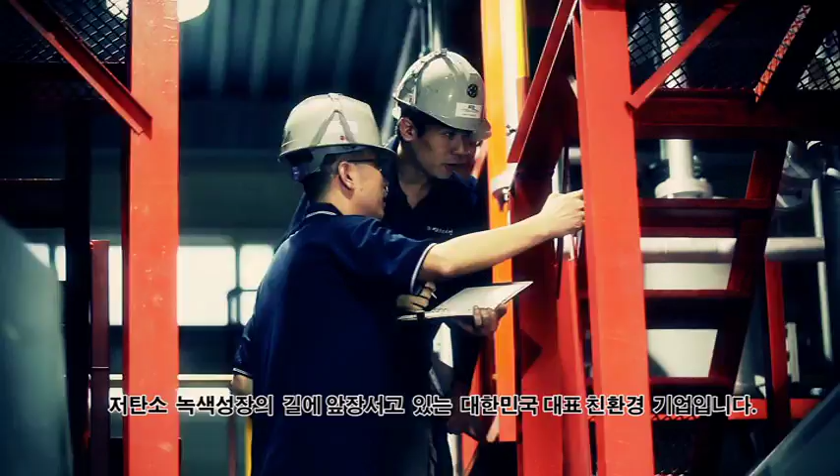Ecocreation is a Korean representative eco-friendly company which is taking the lead in the road of low-carbon green growth under the theme of the treatment of wounded Earth and coexistence of mankind.

Today, the level of environmental pollution is beyond warning and approaching as one of the great national disasters.

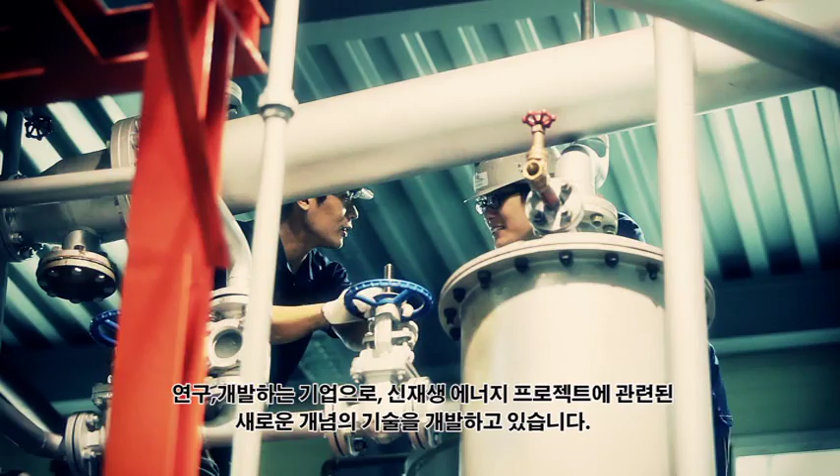Ecocreation has developed a new concept of technology related with new renewable energy project as the company which researches and develops the activation of recycled resources and the alternative energy to prepare for fossil fuel depletion.

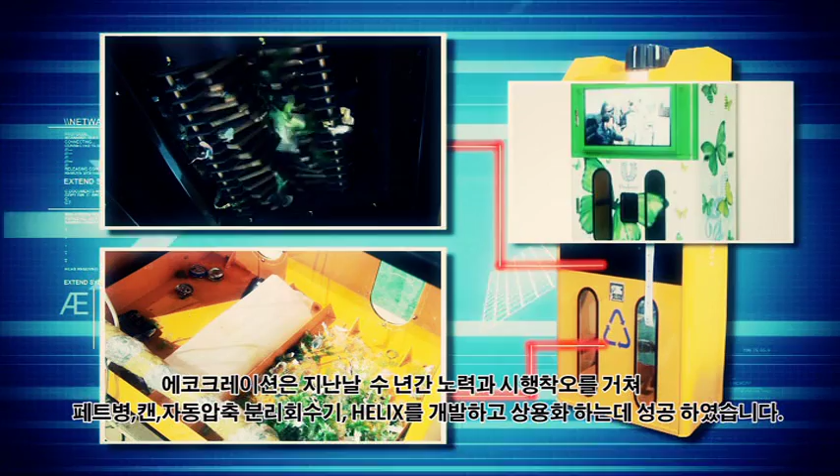Ecocreation has succeeded in developing and commercializing Helix, which is the reverse vending machine for PET bottles and cans, through the efforts and trial and error for many years in the past.

It caught the attention of related industries and newly pioneered the clean technology sector in the field of new renewable energy of high added value from the waste materials of low value added. It is also opening a CO2 emissions reduction and green environment era for the prevention of global warming.

The annual amount of waste plastics is estimated at 6 million tons only in Korea. Also, it is not corroded but accumulated, and so it has a devastating impact on the ecological environment.

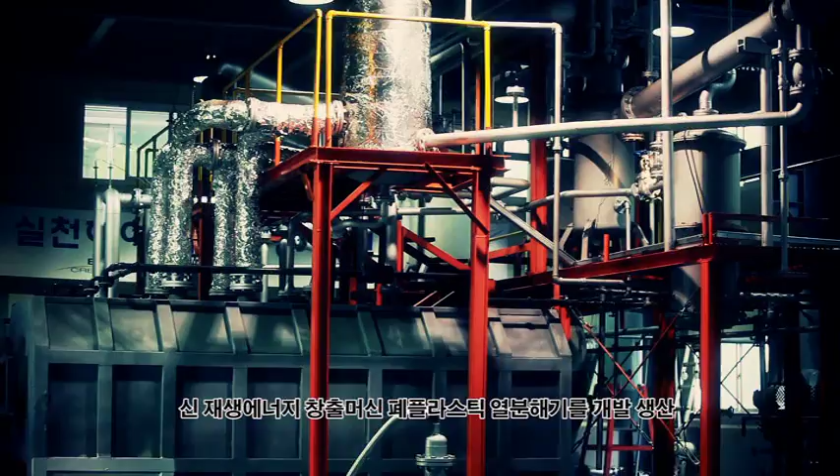In order to improve these parts, Ecocreation is developing and producing the pyrolysis machine of waste plastics, which is a new renewable energy generating machine, through the efforts of many years and labor management unity.

Ecocreation is approaching alternatives to the global environmental problems with a different perspective.

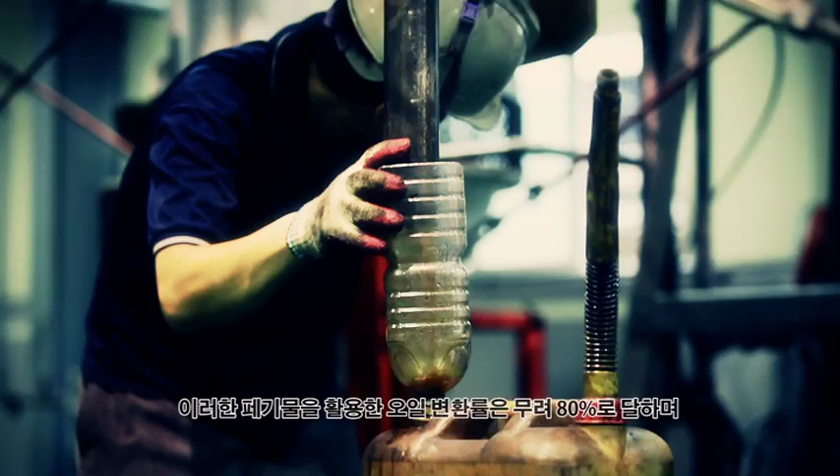The pyrolysis machine of waste plastics is a new renewable energy production machine which is used for diesel engines, generator fuel, industrial boilers, etc., by converting waste plastics, waste lubricating oil, etc. to new oil. The oil conversion rate by utilizing these wastes is as high as 80%.

It is energy which has a more powerful effect than incineration, solid fuel, or gasification business.

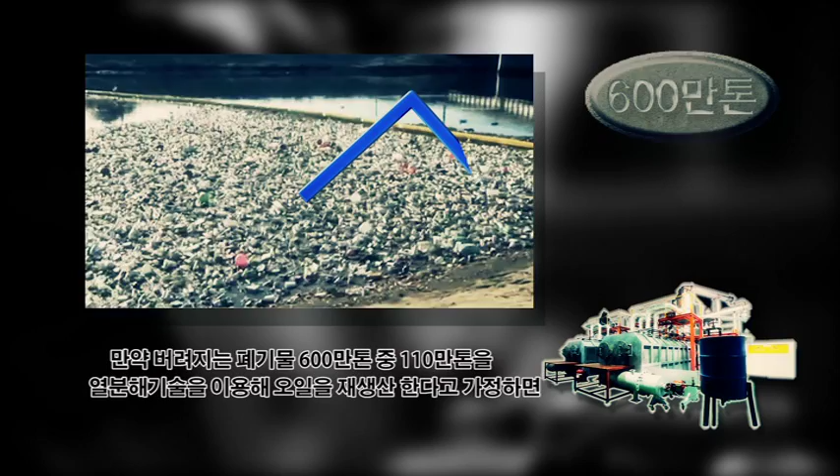Assuming that 1.1 million tons from the 6 million tons of dumped wastes are reproduced as oil by using pyrolysis technology, we could achieve approximately 880,000 tons of oil import substitution effect.

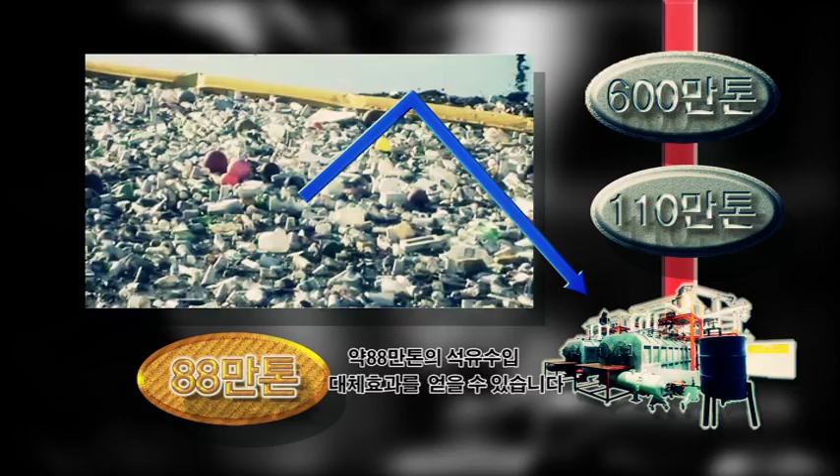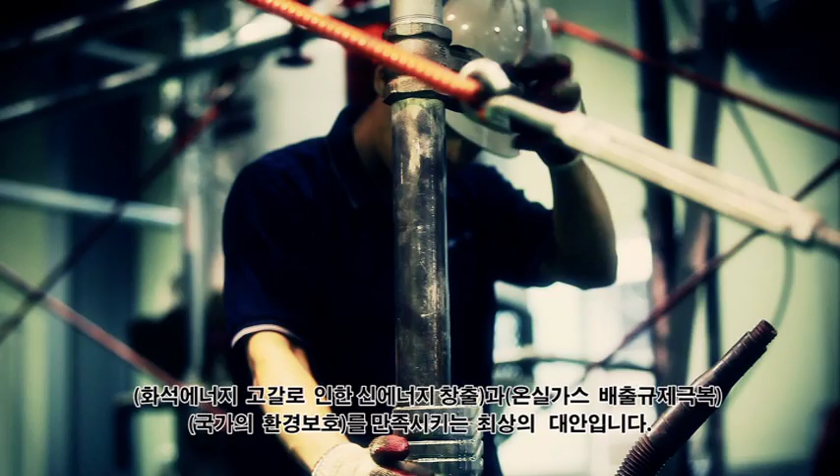The pyrolysis machine of waste plastics is the best alternative that satisfies new energy creation due to the depletion of fossil energy, and overcomes greenhouse gas emission regulation and national environmental protection challenges, due to affordable investment, maximum safety, and high yield oil conversion rate.

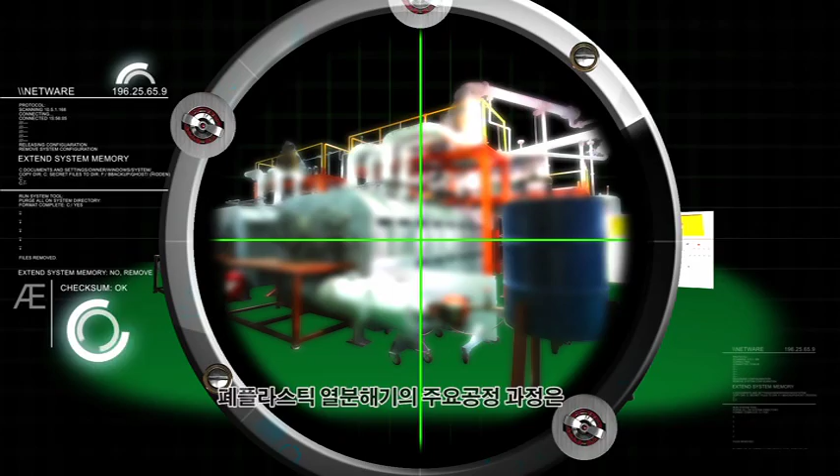The main working process of the pyrolysis machine of waste plastics is: input waste plastics and input liquid phase catalyst, hydrogen chloride neutralizer, and coking preventive.

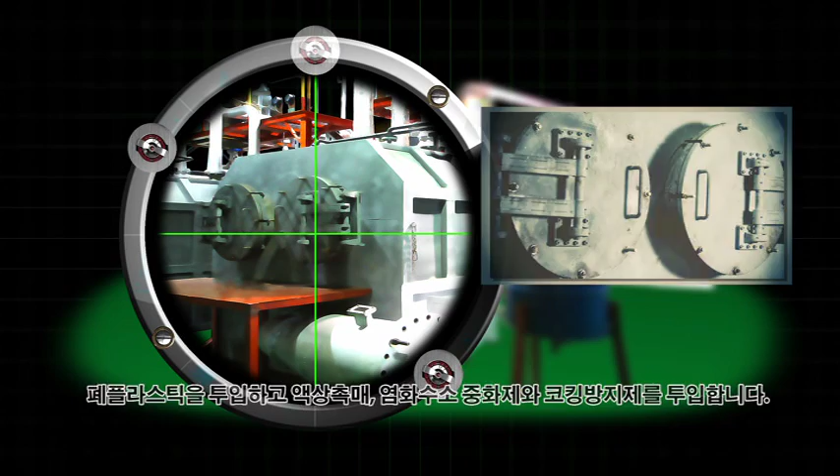Nitrogen generator works and starts the burner. Operation look of the reactor burner.

Catalytic cracking from catalyst column, and decomposed materials move to oil tank through coolers and gas scrubber.

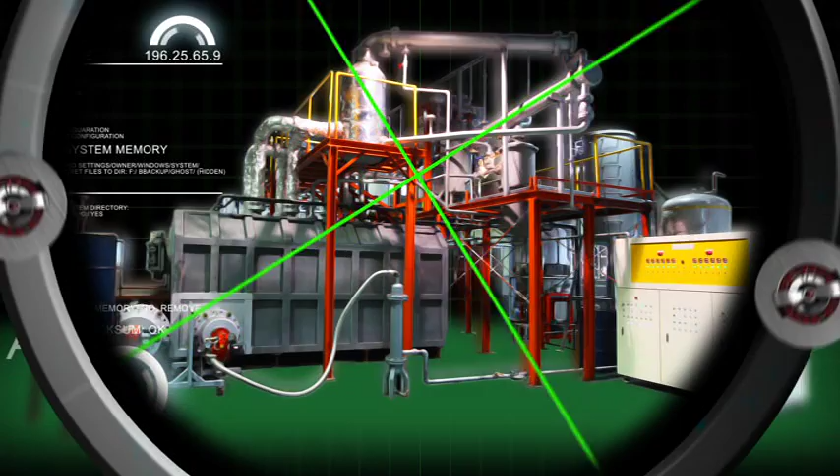Available gas from this process moves to the gas collecting tank. It is reused as operating fuel, and the rest emits to the atmosphere after environmental process of dust collection and odor absorption.

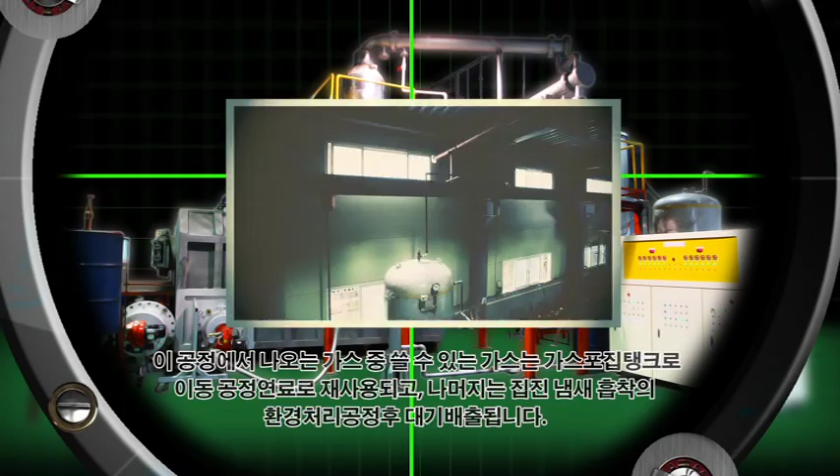Final produced oil is purified as cleaner oil through the purification column.

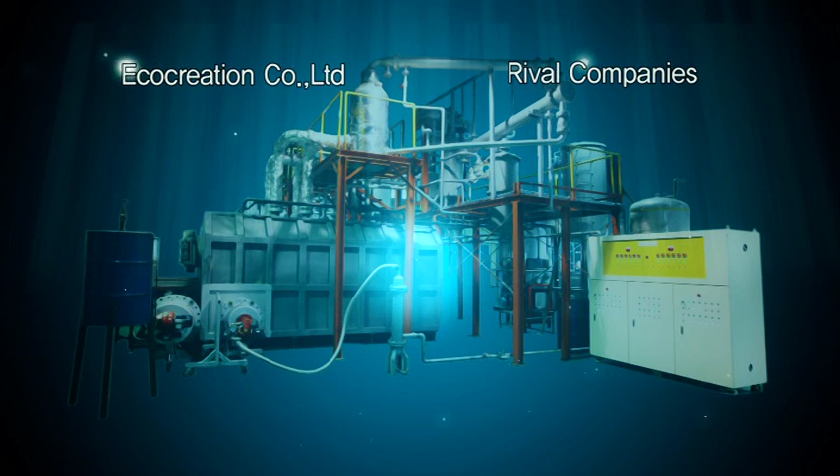Now our pyrolysis machine of waste plastics produces the best quality oil due to the application of world-best process control technology: cracking catalyst, dechlorination liquid catalyst, and coking prevent catalyst.

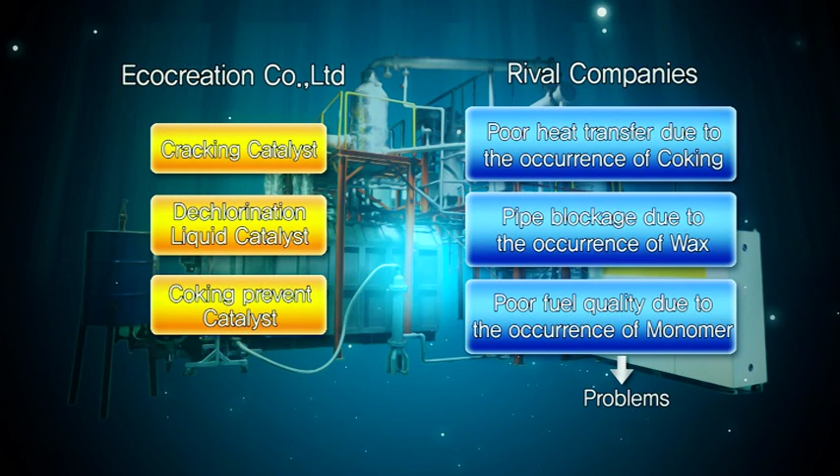These technologies have achieved the best fuel quality by revolutionarily improving problems such as poor heat transfer due to coking, which is a problem in pyrolysis machines of waste plastics from overseas rival companies, pipe blockage due to wax occurrence, and poor fuel quality due to monomer occurrence.

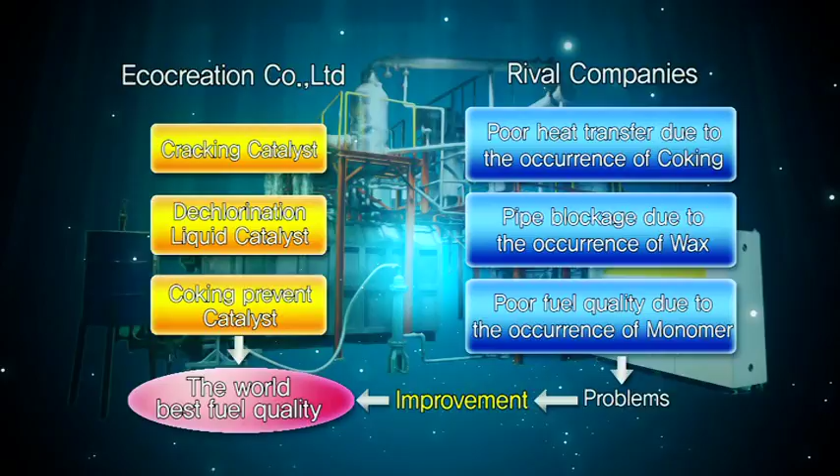The pyrolysis machines of waste plastics from rival companies have a risk of explosion in the body. It is because of the way of heating directly.

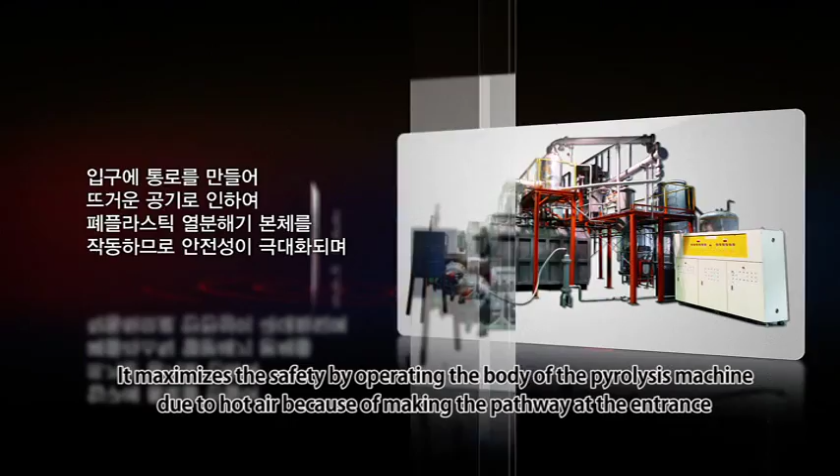But the pyrolysis machine of waste plastics from Ecocreation made the pathway at the entrance, inspired by the way of our traditional furnace, and operates the body by hot air, maximizing safety.

It boasts absolute stability due to various safety valves and nitrogen gas substitution, and shows performance that cannot be compared to any other company, securing various synergy effects.

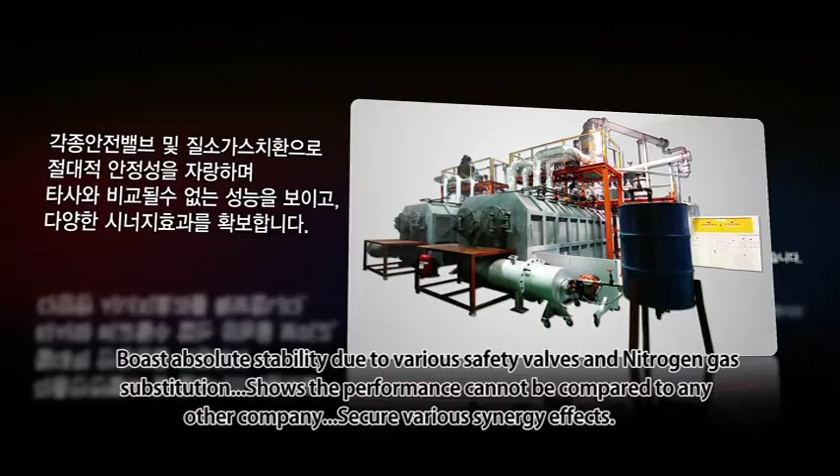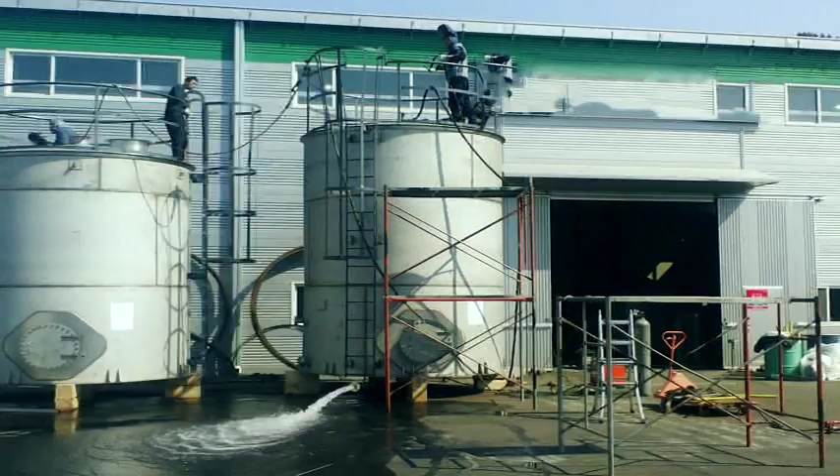Economic security equals minimized investment and minimized operating costs. Stability security equals stability of the equipment and stability of the operating. The tanks are made by high precision welding, X-ray testing for safety, non-destructive testing, etc.

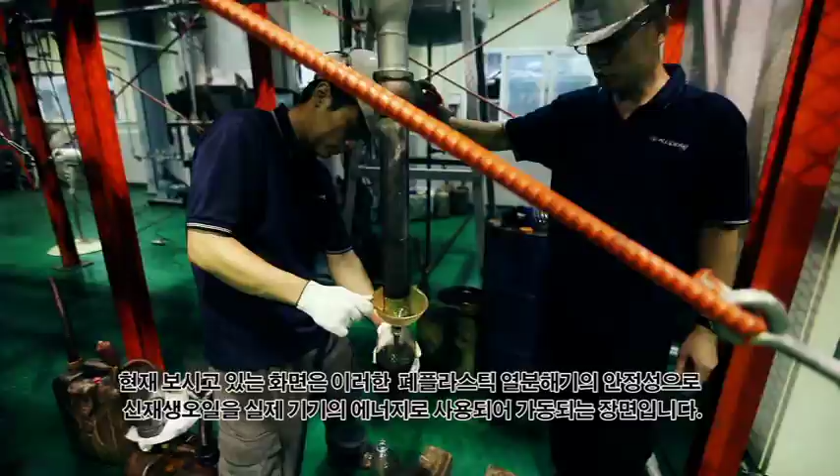The screen you see now is the scene of actual equipment operation using new renewable oil as energy, due to the stability of the pyrolysis machine of waste plastics.

Ecocreation represents its technology by more than 30 certificates in total, including the Green Technology Certificate, Certificate of Venture Company, CE certification of the pyrolysis machine of waste plastics, the patent of the pyrolysis machine of waste plastics, the Certificate of Quality Management System, Environmental Management System Certificate, and so on.

These certificates are the standard of one company's technology, tracing the company's past, and also achievements from blood and sweat.

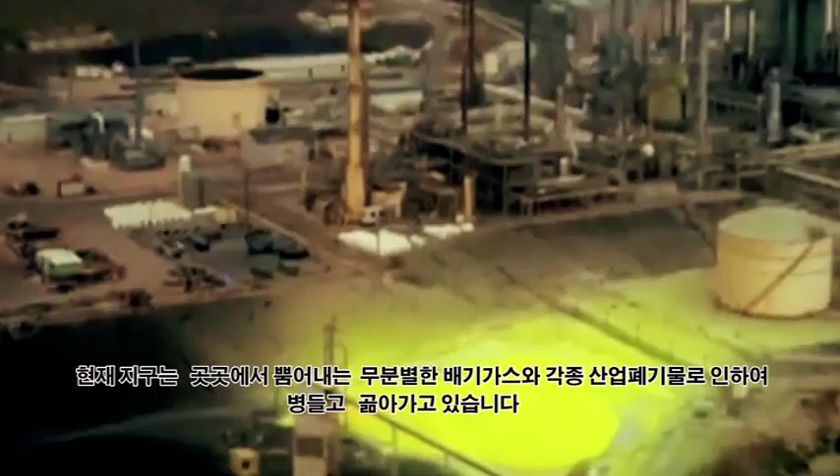The current Earth is diseased and going to fester due to reckless exhaust gas emitting from everywhere and various industrial wastes. Earth warns us even at this time. Soon that warning becomes a disaster, and it will approach as a fatal danger to you or your country.

Environmental protection is the road all of us must walk. Ecocreation will walk first in front of that road.

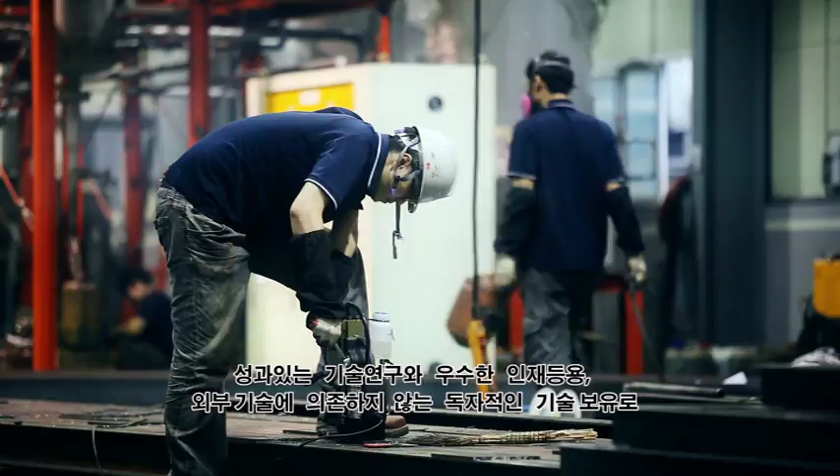We will create a glorious history at the peak of the world's best environmental enterprise with fruitful technical research, recruiting excellent talent, and independent technology that does not rely on external technology. Ecocreation.